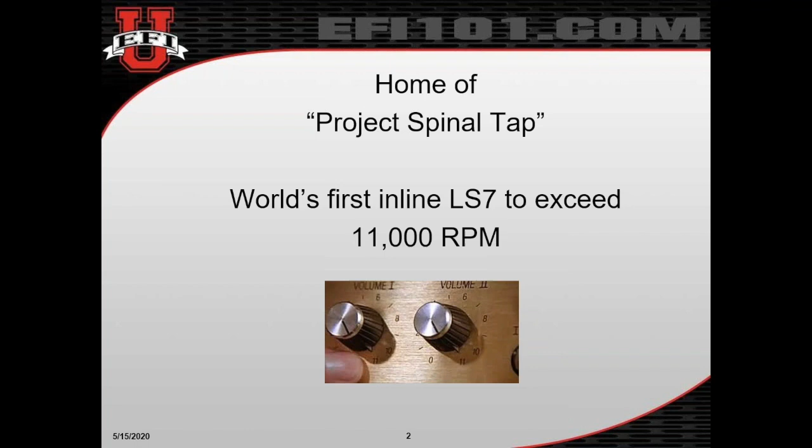I'm sure at least a few of you have probably seen some of that, but we tried this yesterday and it was a little tricky on the technical side to get the sound right. I'm going to try to show you guys a little video here so you can hear the sound of it. So what I did is I made a little video where we focused in on the actual laptop data, and we'll play it through and see if this works for you guys.

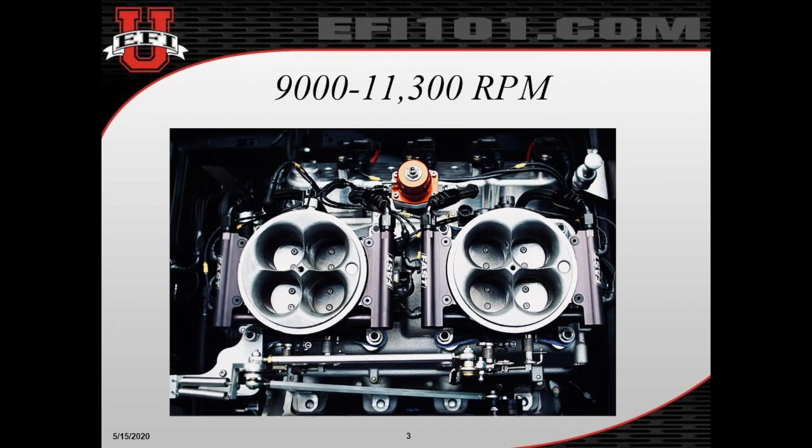So there's kind of a shot looking down into the engine. Now when we ran this thing for real, after all of the spintron testing and all the mocking up and assembly and disassembly and checking stuff, we put it on the dyno and actually ran it. And at the beginning of the dyno pull—now when we talk about high RPM engines, somebody, Lake or Keith, mentioned earlier, you don't start at 3,000 RPM, you start up close to where you're going to be. So most of these dyno pulls on engines like this are typically already starting beyond the RPM where peak engine torque happens.

We're not that interested in that lower area, because other than when you let the clutch out, you'll never see that RPM in a true drag race, say like a comp eliminator or pro stock application. You go to 10.5 and make a gear change and it only falls back to maybe 9,000, even though the engine might make peak torque at say 8,000 RPM. So to avoid stress on the engine, you typically start a little higher.

So this is the shot looking down in the throttle bodies of that engine, and we started the dyno pull at 9,000 RPM and went up from there. Let's try this real quick—you can see my mouse. We're basically in a high idle situation, waiting for water temp and oil temp and pan vacuum, everything to build. Hopefully you can hear the sound here when I play it, and you can see the beginning of the pull at 9,000, then it revs up at about a typical dyno pull rate of like 600 RPMs per second. So let's see if this will play and let us hear it.

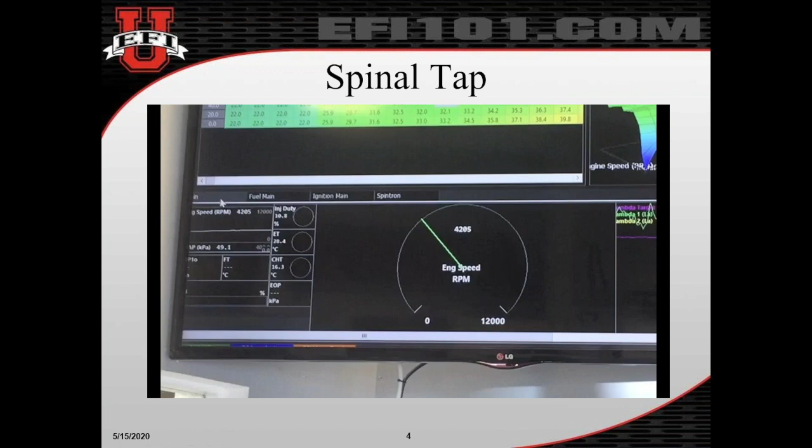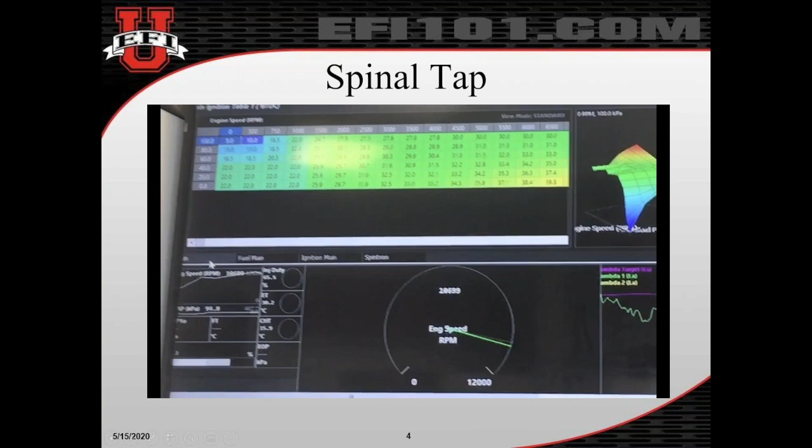All right, so hopefully you could hear that. I've probably only listened to that 6 or 7 million times because the sound just never stops being cool. And I saw it in real life. So hopefully you guys like that, hopefully you could hear it actually. If you didn't hear it, somebody let me know and I'll figure out how to play it again.

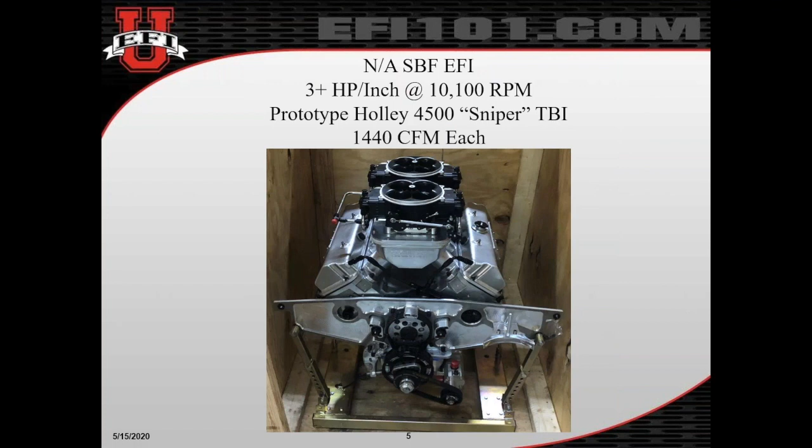So here's another example of an engine we just recently did. That was an EFI conversion. This is a naturally aspirated small block Ford engine. It made peak power at over 10,000 RPM and over 3 horsepower per cubic inch naturally aspirated, a very serious piece.

But what's cool about this engine is we used some prototype Holley 4500, what they call Sniper throttle body injection units. They flow about 1,400 CFM each, so we had plenty of airflow.

But we're kind of moving into this era where we've been told forever that EFI will never make as much power as carburetors. I've had to look at that so much over the years and shake my head, but in fairness, nobody's ever done a real comparison of where the fuel's coming from.

What's unique about the new Holley Sniper throttle bodies is that the fuel discharged from them - if you look inside those bowls, there's injectors in there, but they spray into a little annular discharge ring, and the fuel is distributed all the way around the throttle bore. So when you look down inside them, there's no booster venturis to get in the way. Billy alluded to that earlier, where in a traditional carburetor we're very concerned with airspeed through there to try to make sure we're metering fuel out of that venturi correctly. The downside is having that booster venturi there hurts airflow.

For a much smaller butterfly size or throttle opening, we can end up flowing a lot more air. The challenge has always been how do we get the fuel high enough in the system that we get that benefit of evaporation and cooling effect so we can make the power a real carburetor would make. So for the first time, we were able to actually run an engine and make more power with the EFI system than it made with a carburetor.

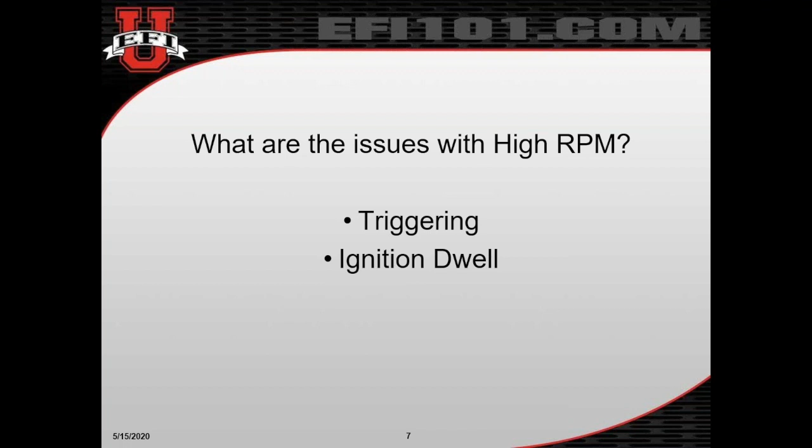So the first one is triggering - that's how we actually get the engine speed and position to the computer that's going to control things. After triggering, we have ignition dwell. If you're familiar with old school distributors with points, dwell is how long we have available to charge the coil so we can get enough energy. Then after triggering and dwell, we have the injector dead time and the offset. These are all contributing factors to what makes it difficult to do these extremely high RPMs.

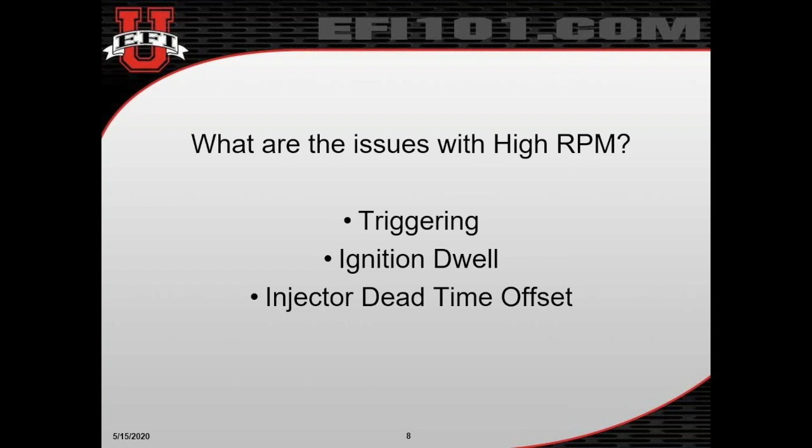Let's take a look here. Starting with the typical trigger system, you'd have a trigger wheel, what we'd call the reference - that's your RPM signal, typically on the crankshaft. Some engines also use a cam trigger, which we'd call a sync, because it synchronizes the position of the engine. So if I know where, for example, number 1 cylinder is relative to top dead center, what I don't know if I'm only looking at the crankshaft is whether I'm at the end of the exhaust stroke and beginning of the intake stroke at TDC, or at the top of the compression stroke ready to start my firing stroke at TDC.

By adding the cam sync, we can tell which half of that engine cycle we're on, and then we know how to fire which coil and which injector in the sequence of the engine. We'll point that out again later when we talk about the idea of sequentially firing a system.

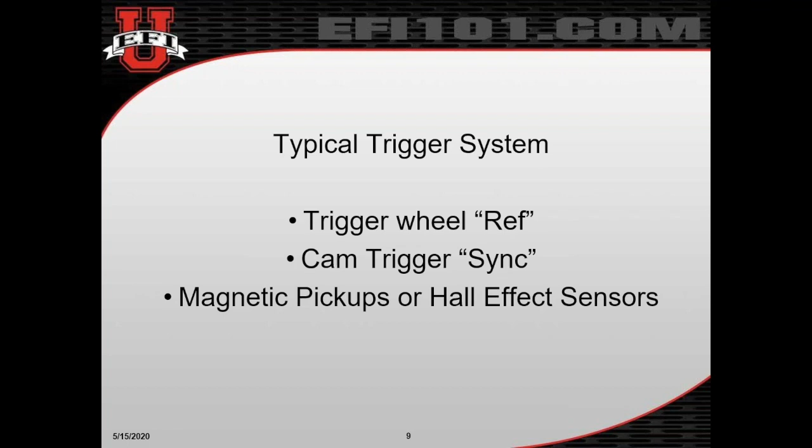Typically you would have either a magnetic or what's called a Hall effect sensor pickup. Those both have pros and cons, but generally what happens is if you're working on an engine, quite often people end up using whichever type came on the engine from the OEM. So unless you're building an engine from scratch and you needed to choose, there's not really a ton of upside or downside that makes one far superior to the other. Both can be used successfully.

Typically what that would look like is you'd have a crank sensor mounted physically to the engine block somewhere, and then on your crankshaft you have a wheel turning with some predefined teeth, the number of teeth, position, so on and so forth. And remember, that gives me my engine speed and position, but not necessarily the phasing of the engine. So I know where I am relative to TDC, but I'm not sure which TDC it actually is.

By adding that secondary sensor, it does the same thing, but this one would be on the camshaft. Now I have a recognizable event, because our camshaft is only spinning half the speed of the crankshaft, and therefore that event would occur less often, so we can arrange a trigger pattern that makes sense to the ECU to work out where we're at there.

Not all engines use those. In fact, the vast majority of pushrod V8 engines in drag racing do not use a secondary cam sensor, because it's just more stuff to bolt on and more wiring to have problems with and things that can fail.

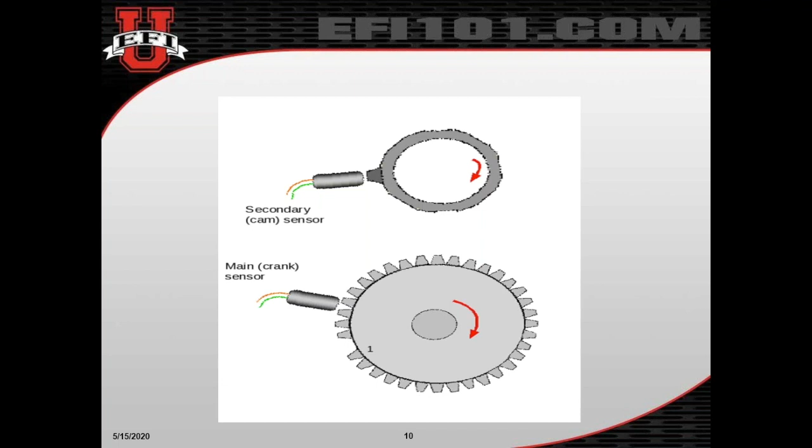So the vast majority of engines use some crank trigger and then typically an ignition distributor. There's no need to know where the camshaft is because the rotor in the distributor is phased to always point at the right cylinder. We're going to look at that here in just a little bit. And since they're not trying to fire fuel injectors in any particular order because it's carbureted, they don't need that cam sensor.

So the crank trigger or the ref sensor sits in close proximity to that reluctor wheel as we saw, and it provides angular position measurement to the ECU. Your computer would be programmed then with the tooth locations and the number of teeth. So you'll hear people use terms like LS1 uses a 24X trigger and an LS3 or an LS7 uses a 58X trigger.

And what they're talking about is the number of triggering events that are on that crank wheel for one revolution of the crankshaft. So the computer needs to be programmed with the tooth locations and the number of teeth in order for it to accurately understand where the engine is.

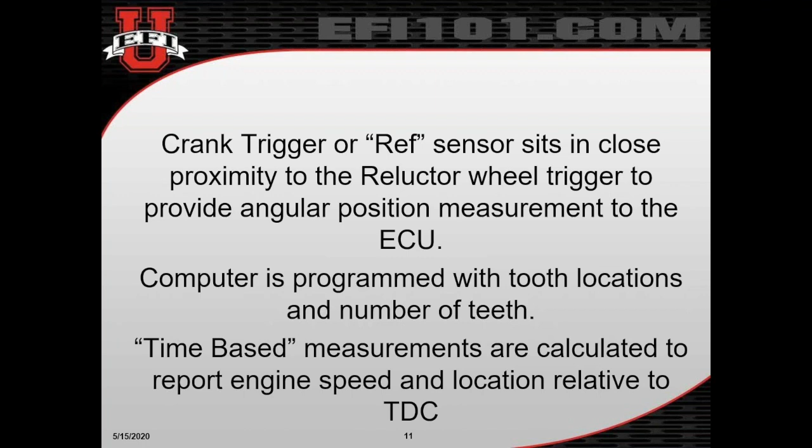So then these time-based measurements are calculated to report the engine speed relative to TDC. What do I mean when I say time-based? Well, many traditional systems, you guys have probably seen an MSD flying magnet. So generally with a flying magnet, you have 4 magnets on the actual crankshaft here, and then we have our pickup sensor down here that's located in proximity to the pickup, so the wheel. So from a physical measurement standpoint, we only get an event every 90 degrees.

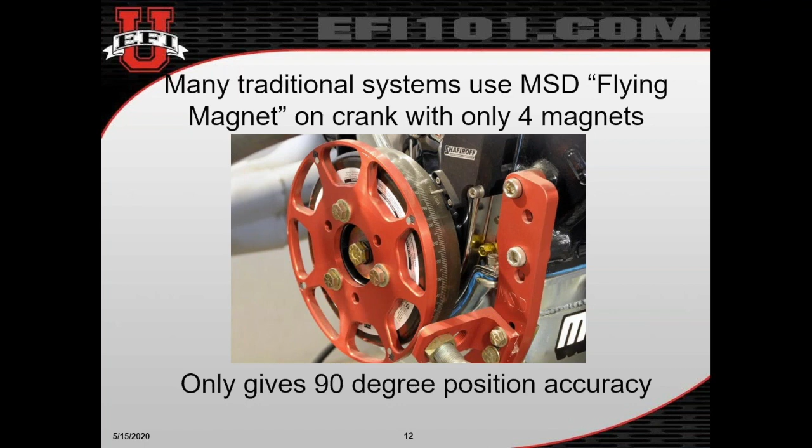So when I say time-based measurements, we can actually calculate the time between any 2 events and be able to work out pretty quickly how fast the engine's actually turning and whether it's speeding up or slowing down, so we can predict the right time to, say, fire a coil for a sparking event or maybe even a fuel injector or whatever. But in truth, most of it is based on an accurate guess of working out what the engine speed is after we physically know the position every 90 degrees.

So when we put more teeth on the trigger wheel, we get a higher position resolution, but obviously that also requires more computational power. So for example, a stock GM LS ECU or engine control unit typically limits the engine speed to approximately 8,000 RPM. It goes a little more than that on some, maybe 8,100, 8,200, but not much higher than that.

So in order to make an LS style engine go above that low 8,000 RPM range, the first thing that we had to do was dump the factory ECU and go to an aftermarket computer that was capable of much higher RPMs.

There are a lot of things you can change and retune and reprogram in a factory stock ECU, but the hard RPM limit is not one of them. It's hard coded in the ECU and it's not easy to change that.

So we did that when we were working on Project Spinal Tap, and after all the work and endeavors, the day we finally got it running was such a wave of relief, like oh my gosh, after 2 or 3 years of work, it's finally happening. I'll never forget the first time we revved the thing up, it was going up, started at 8,000 or 8,500, the thing's going up, and all of a sudden, bang, it just hits the rev limiter.

I'm like, man, I feel so dumb after all this time. I forgot to raise the rev limiter, and we hit the limiter at 9,200 or 9,300. I was like, man, that was a waste of a run and time on the valve springs and whatever else.

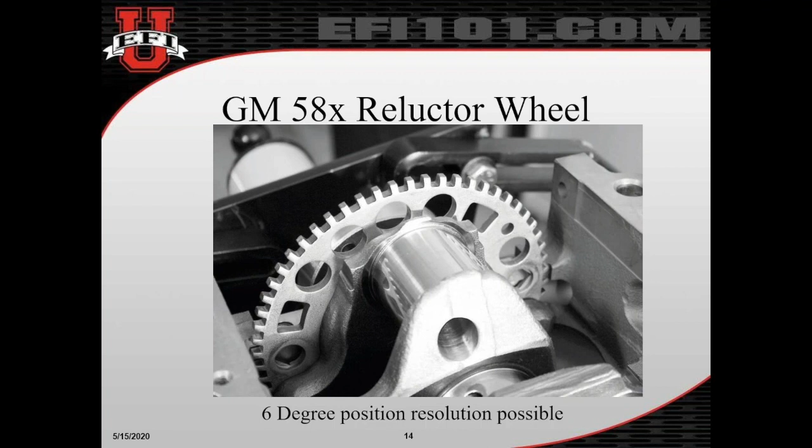To give you an idea, here's a look at the factory GM LS3, LS7, LS9, all of them. It's got 60 teeth on this wheel. They call it a 58X because there's 60 total teeth that are evenly spaced, but then they knock 2 of them off, so that every time that missing 2 teeth passes the sensor, we'll know where we are relative to TDC.

If I just had 60 evenly spaced teeth, I could count the engine speed, but I wouldn't know the engine position because there's no way to differentiate which tooth actually lines up near TDC. So by having a missing gap, it's really 58 events and 2 missing, so we call it 58X.

The nice thing about that is we have 6-degree position resolution because you have 360-degree travel and there's 60 teeth, so it works out pretty nice to have a really fine resolution.

So you got to ask yourself, why wouldn't you want that? Well, you would want that if you were running a normal vehicle.

GM and Bosch and all the other manufacturers that make those kind of wheels do it mostly so they can have more finite control of the engine, specifically in reference to things like exhaust emissions. It's easy to detect a cylinder misfire if I can see the engine's acceleration and deceleration rates more often than, say, every just 90 degrees of crank travel.

Not only can we see that the engine's speeding up or slowing down, but you could say, for example, I know that in one engine revolution, there should be 4 excitations of the crankshaft. Every time one of the pistons fires, it should speed that crankshaft up a little bit. So if somewhere around the circle we see a dip in engine speed or a deceleration, we could work out pretty quickly that somebody didn't do their job and one of those cylinders probably misfired. We can even tell which one it is if we know where it was in the firing order.

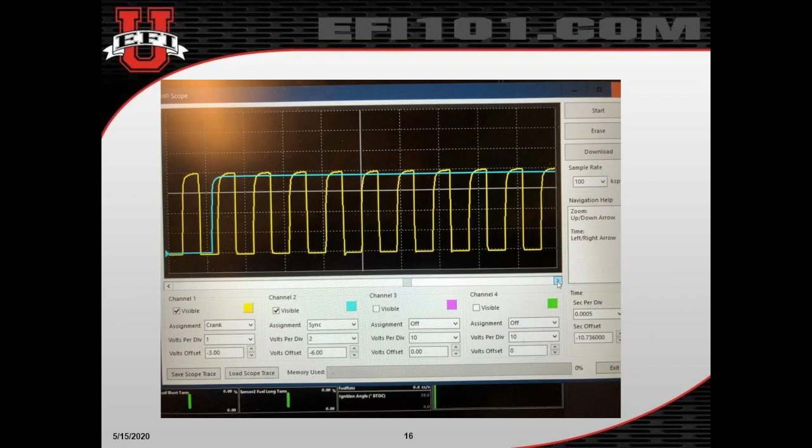As we go higher and higher in RPM, these triggers are coming faster and faster in frequency, and so this edge gets more rounded and more rounded. When that slope gets really steep down here, you can fall below the triggering threshold for what your ECU sees as an actual event, and it can get filtered out. When that happens, you get into a situation where it will just drop a cylinder, cut, or misfire, and it will fool you, like it did me, into thinking you're sitting on a rev limiter when you're really not.

So what's the right answer? Do I use a 4X trigger and give up my resolution, or do I use a 58X trigger and have all the resolution but have this high-speed issue?

Well, we ran into this problem in 2016 and 2017 when the NHRA Pro Stock teams went to EFI. Everybody on the surface wanted the high resolution, but what we found is we got into issues where that could be a problem. So we tried a bunch of different wheels - 8 teeth, 12 teeth, 24, 36, you name it.

And what we found was the 36-1, or 36 evenly spaced teeth with 1 missing, was a great compromise. With a 36-1 wheel, we get every 10 degrees of resolution possible, but we could do a lot more total engine speed with a 36-1 than we could going to a 58X. So with the 58X, we get a little bit more resolution, but at the cost of a lot lower total RPM capability, whereas going from a 4X tooth to a 36X tooth, we get a ton more resolution.

Just as an example, if you could do 9,200 RPM with 60 teeth, and that was roughly the limit, well if I cut those teeth down to only 36 events per revolution, that's 67% more RPM I could do. So by going to a simple change like a 36-1 trigger, we could theoretically do 15,300 and even more RPM.

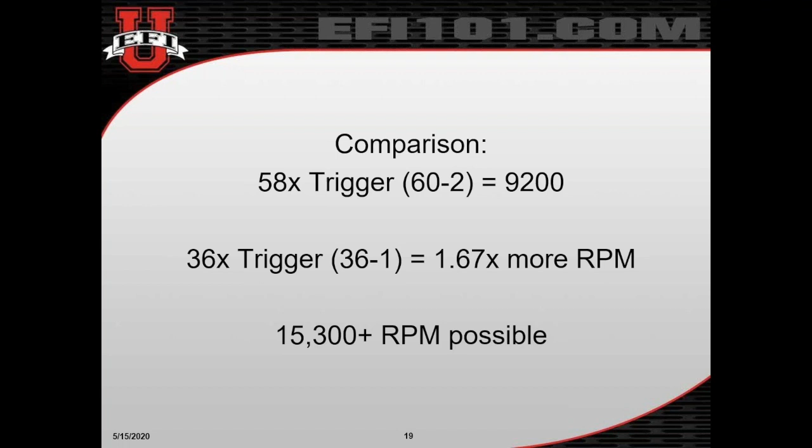Just use as much resolution as you need, but not more than you need, because it can get you. So there you go, that's just a little insight on what we learned from triggering. So let's talk about the ignition system then.

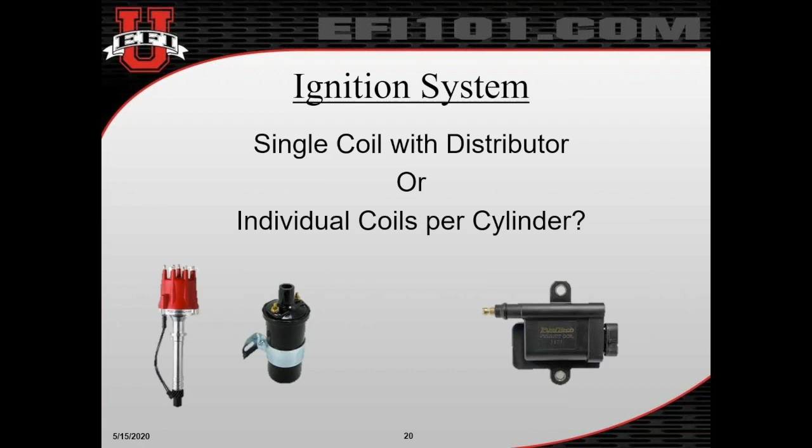Traditionally, your ignition system would have a single coil and a distributor, or you might have individual coils per cylinder with a more modern system. So the question becomes, what's the advantage? It costs a lot more, I've got more wiring, more things that can fail. Why would I want to do that?

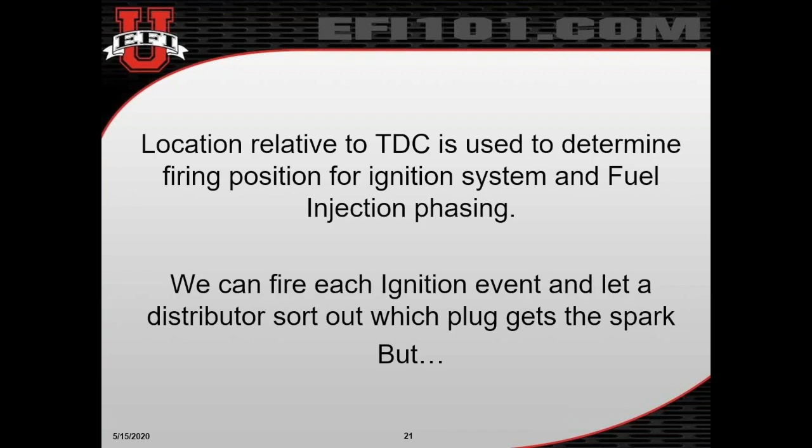We could get the location relative to TDC and use that to determine the firing position for both my ignition system and my fuel injection phasing. We fire each ignition event and let the distributor sort it out, and the spark plug gets its spark based on where the rotor's phase. A lot of people do that, even with a throttle body EFI system or carburetors, but they want to run a distributor. It's easy to do with a crank trigger and not need a cam trigger.

What we're talking about here is when we go to charge the coil - we talked about dwell earlier. A lot of people ask, what's dwell? It's the time it takes the coil to charge from your primary battery voltage to the secondary level, and that typically takes between 3 to 5 milliseconds to fully charge. So we're talking about thousandths of a second.

If you run out of energy here - if I started charging this coil and stopped in the middle before reaching the peak - I wouldn't have the maximum energy available to fire the spark plug. Maybe that's a problem, maybe it's not, but I'll show you an example.

This is what they call the Mercury Marine, or the smart coil, that's used in tons of different applications. I don't have one of the old-fashioned coils to show you because I was born in 1976 and we're not using antique stuff anymore.

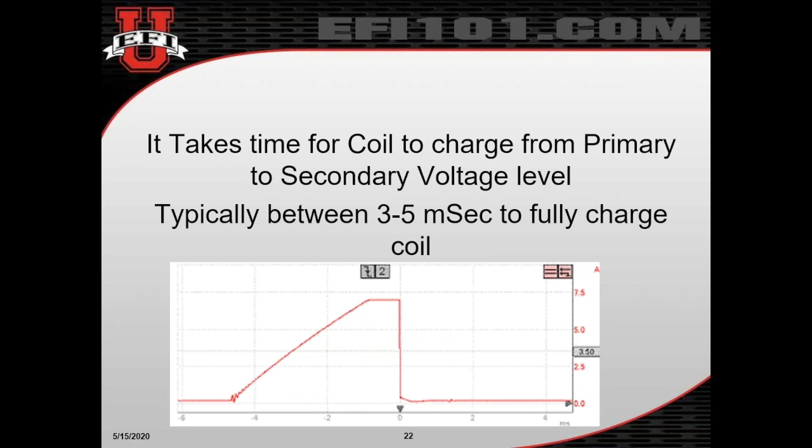So let's think about that a minute. In order to give full spark energy to the cylinders, we're going to need somewhere between 3 to 5 milliseconds to charge each coil. I've got 8 times I need to fire if I have a V8 engine. So 3 times 8 is 24 milliseconds, and 5 milliseconds times 8 is 40. I need somewhere between 24 and 40 milliseconds worth of time to actually charge and fire all the spark plugs with maximum coil energy on a V8 engine.

In our little graph here, you can see the dwell time is how long I'm actually charging the coil, from B to C basically, and at A, I fire the thing. Now that I'm done, I can rest between A and B in my idle time - I can rest for however long is available before it's time to start charging again for the next event.

Thinking about that for a minute, how long does an engine cycle actually take? When I talk about an engine cycle for a 4-stroke V8 engine, remember I'm talking about 2 revolutions of the crankshaft - the first one fires half the cylinders, the second one fires the other half. Here's an easy math problem for you to remember: if you want to know how much time it takes for an engine cycle in milliseconds, all you have to remember is this easy formula - it's 120,000 divided by the RPM.

Go ahead and try it. I'll wait. All right, that's long enough.

You guys are taking too long. I'll just give you an example here.

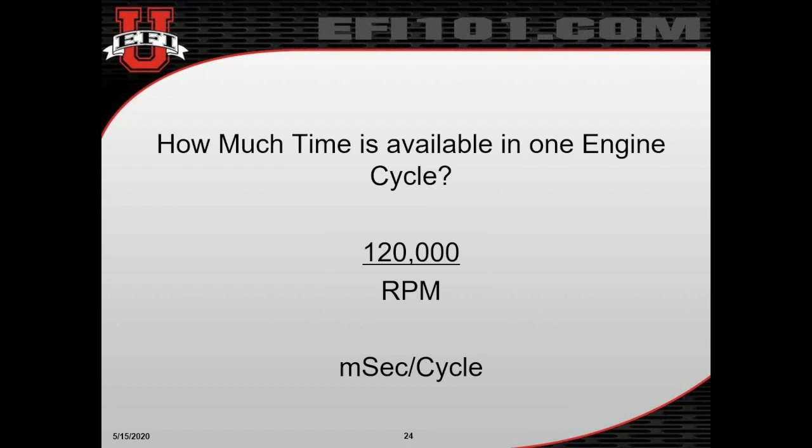Using that math problem, at 6,000 RPM we have 20 milliseconds. But at 10,000 RPM, because the engine's turning faster, it only takes 12 milliseconds. And at 12,000 RPM, it only takes 10 milliseconds. Now think about that for just a second.

Let's talk about 6,000 RPM. What's actually happening in an engine cycle? We start at top dead center, and the intake valve opens while the piston begins to move down. That creates a larger volume in the cylinder, which lowers the cylinder pressure. So we have a differential across the intake valve that causes air and hopefully fuel to start moving into the cylinder. The piston goes all the way down to the bottom, then starts going back up and compressing that mixture. At some point we close the intake valve so no more air and fuel can get in or out.

We continue compressing that mixture until somewhere near top dead center, we light the spark plug a little bit early. That's what we call spark advance, to give the flame a running start and an advantage to burn all the mixture in the chamber. Now that burning mixture starts to expand and puts power and energy against the piston, pushing it back down in the bore. It's putting leverage against the crankshaft, but the whole time my volume's getting bigger, so I'm losing pressure.

Somewhere near the bottom half of that stroke, or getting close to bottom dead center, we open the exhaust valve and start moving exhaust out of the engine. The piston gets to the bottom and stops, then starts coming all the way back up, pushing that air out the exhaust valve because of the higher pressure being created by the lower volume. We get all the way to the top, and hopefully we'll have a low pressure in the exhaust system that helps draw some of that air out and scavenge the cylinder, and then we're done and can start over.

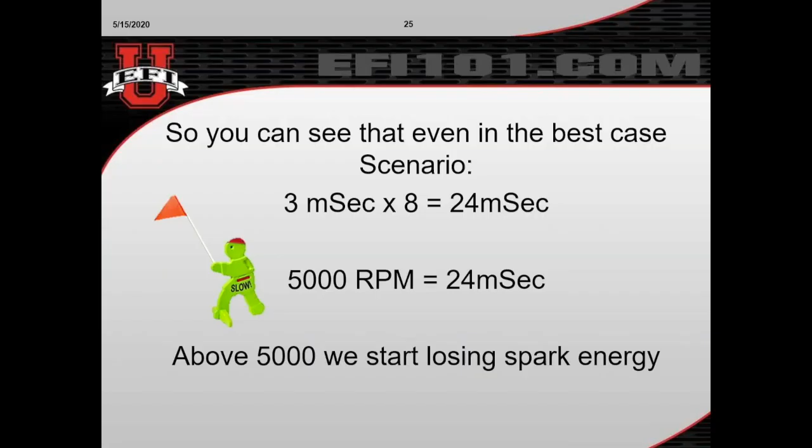As you can see, if I have a single coil, even in the best case scenario where it only takes 3 milliseconds to charge my coil, and I have to charge it 8 times, that's 24 milliseconds. Well, at 5,000 RPM, the entire engine cycle takes 24 milliseconds. That means with a single coil, after 5,000 RPM, I'm no longer able to completely charge and discharge the standard old-fashioned points ignition or HEI style ignition coil. We physically do not have enough time left in the engine cycle to do that.

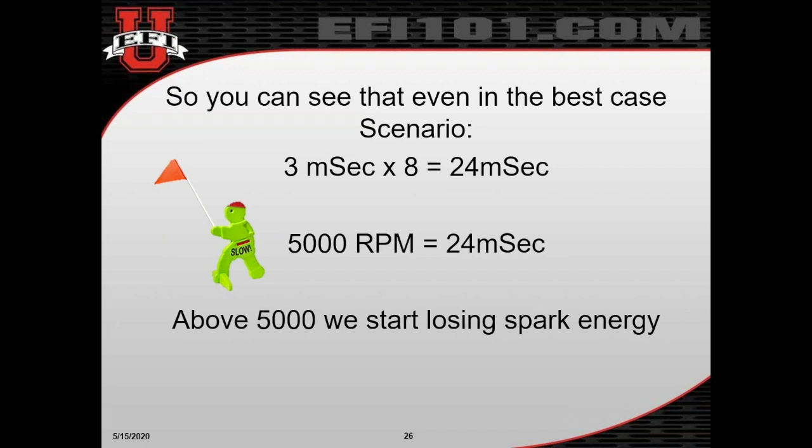Traditionally, the way to overcome that is to start with a huge excess of coil spark energy, more than we actually needed to get the event done, so that as I'm losing some, I don't fall below the required amount that it takes to actually light the cylinder.

Some of this can be overcome by using an ignition system that starts out with a large excess of energy, such as an MSD-like capacitive discharge ignition system. The CDI stores energy in capacitors and can have a much higher primary voltage delivered to the ignition coil much faster, so we have more excess of time available. Even though our RPM is going up and up, I still have more ignition energy than I actually needed to fire the spark plug, so I can kind of get away with that time, as Billy calls it, the time-space continuum.

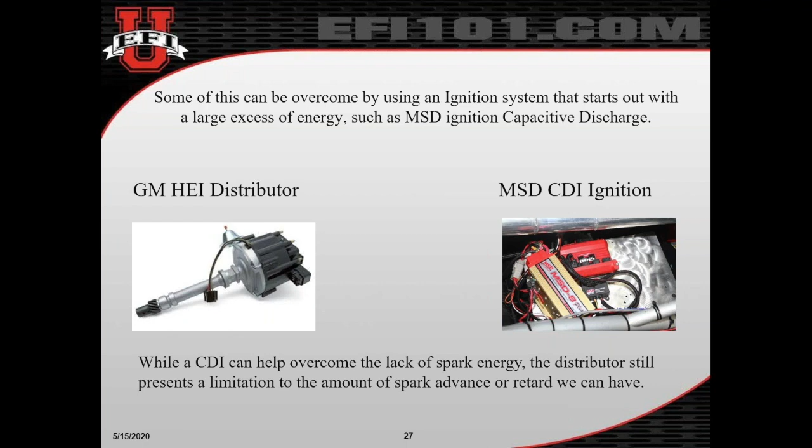So while we could solve that distributor-based problem with a CDI and get the spark energy we need, we still have a physical limitation by using a distributor rather than individual ignition coils. That maybe isn't a problem for a naturally aspirated drag racer, but if you're doing nitrous, or some form of boost with a procharger, supercharger, or turbo, quite often you have pretty extreme swings in what you want to do with your ignition timing that are limited by the physical travel of the distributor and the rotor phasing inside it. So by going to individual coils, we can use a cam sync instead of just having a crank trigger and a distributor.

If we use a cam sync, since we know where we are within the engine cycle, we can tell if I'm on the exhaust stroke or the TDC compression stroke. So now we can fire each coil and fuel injector simultaneously and in order, in the correct firing order. So if you think about that, where I had one coil that needed to fire 8 times in one engine cycle, now I have 8 coils that individually only need to fire once per engine cycle. 1 divided by 8 - obviously you get the idea - I have 87.5% more time for the coils to rest and recharge.

So in terms of doing high RPM, high energy ignitions, the benefit we gave up by not having the high energy CDI capacitive discharge ignition systems - which, in fairness, produce a very hot spark - is that they do it for a very short duration. So what can happen at extreme engine speeds is, even though I get a very hot spark from a capacitive discharge ignition, the actual spark event only lasts for 1, 2, or 3 degrees of crank rotation. So if anything happens with your mixture distribution inside the cylinder where you miss it, you're out of luck - you're going to have a cylinder misfire.

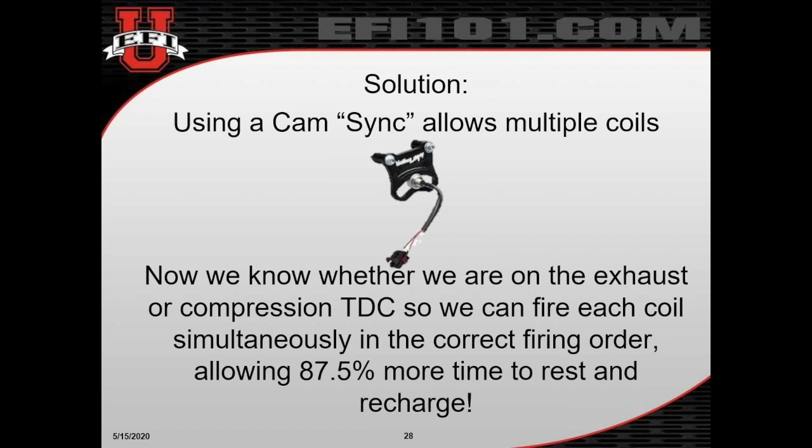Even though inductive style ignition systems like our smart coils technically have less energy available than a traditional CDI, they typically will discharge that spark across the plug gap at, say, 10,000 RPM for something in the order of 14 or 15 total crank degrees. So you might get 6 to 7 or even 8 times as long an opportunity to light the mixture because of the length of time it takes the spark to jump across the plug gap. So I'm a big fan of using these smart inductive style coils in a high RPM application because I have enough spark energy to do the job, I get a long spark duration to give me the most opportunity to get the mixture lit, and I get a lot of time to make sure that coil is fully charged. It's a great example of using modern technology in a high RPM engine.

Here's an example of individual coils in each cylinder. It gives us the ability to have extreme advance or retard functions, such as doing boost enhancement or smoother rev limiting. A lot of people ask what I mean by rev limiting. If you think about what's happening to the engine and crankshaft - you're at 10 or 11,000 RPM, or who knows what, and suddenly you start banging the rev limiter - the amount of torsional twist that happens to the crankshaft because one cylinder isn't doing its job, or 2 or 4 randomly, means we're pounding on the crankshaft while the counterweights try to keep everything in balance, and then suddenly it doesn't fire for a couple of cycles.

That twisting motion of the crankshaft takes a beating, and so does everything else behind it, drivetrain and everything. So by being able to do some of our rev limiting by retarding the ignition timing, much like an OEM strategy, we can limit the engine's torque output temporarily with a 1 cycle or 2 cycle retard function rather than simply a cut and chopping that cylinder off.

So we get a lot of advantages to the individual coil per cylinder type application in a high-speed engine that aren't necessarily showing through on the surface if you were only to look at the spec sheets of how much energy this one has and how much energy this one has. It doesn't really show up until you actually start doing this stuff. So there you go, hope you guys like that.

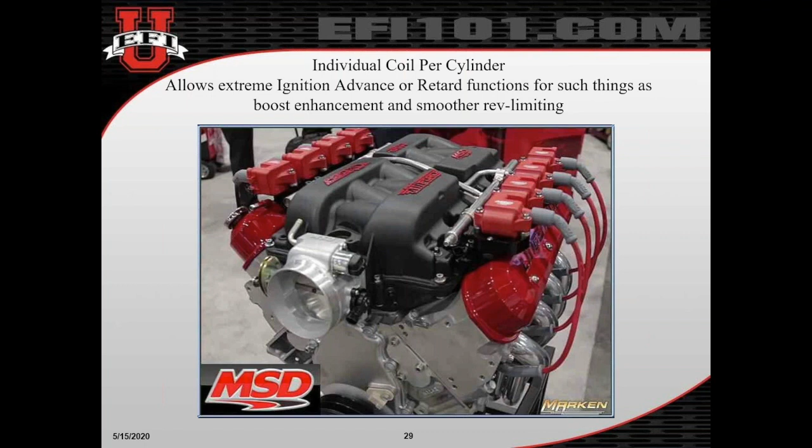But one of the big ones that pops up a lot is what happens to the fuel injectors in a high-speed engine, especially when we do this without a cam sync sensor. So let's talk about it a second.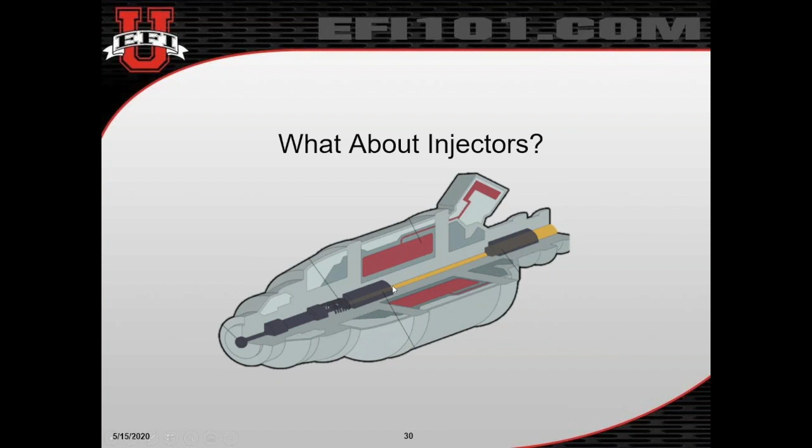So when we talk about injectors, a lot of people talk about the injector size and the flow rate of the injector and pulse width and duty cycle and all these different things. But the one that I want to focus on for just a minute here is called duty cycle. And if you're not familiar, I want to simplify it for you, because the duty cycle of an injector is the comparison of the flow capacity of the injector to what your engine actually demands. So there's more technical ways to describe it when we talk about the relationship of injector pulse width to time per engine cycle and all that.

Let's say I have a V8 engine and I have 8 injectors. Now these injectors, here's one, and here's one. They flow 80 pounds per hour each. That's what we call the slope of the injector. So since I have 8 of them and each one flows 80 pounds per hour, we could assume that I'm going to have a total of 640 pounds per hour of fuel flow available to give my engine.

So what determines how much of that fuel flow the engine's actually going to see? Well, the answer is how much power you make. So let's say we have an engine that makes 1,200 horsepower. Now this 1,200 horsepower engine has a brake-specific fuel consumption of 0.45. If you're unfamiliar, brake-specific fuel consumption is a measurement that we take that shows us, for the amount of fuel we actually consumed, how much power did we actually make. So a typical high RPM, naturally aspirated, high compression engine, they'll be 0.45 or better. Most of the time even better than that, but this is a good example.

So let's say I need to feed a 1,200 horsepower engine, and it needs 0.45 pounds of fuel for every horsepower per hour. Well, doing some quick math, if you multiply 1,200 times 0.45, you see that we're going to need 540 pounds per hour to feed the demand of that engine. Make sense? All right, so now let's compare how much fuel we need to how much fuel we actually have available. So in the next slide, we're going to need roughly 84% of the injector's capacity. Regardless of what engine speed we're talking about, we're going to need 84%.

But percentages and real actual time, they're not the same thing. So let's take a look at what I'm talking about.

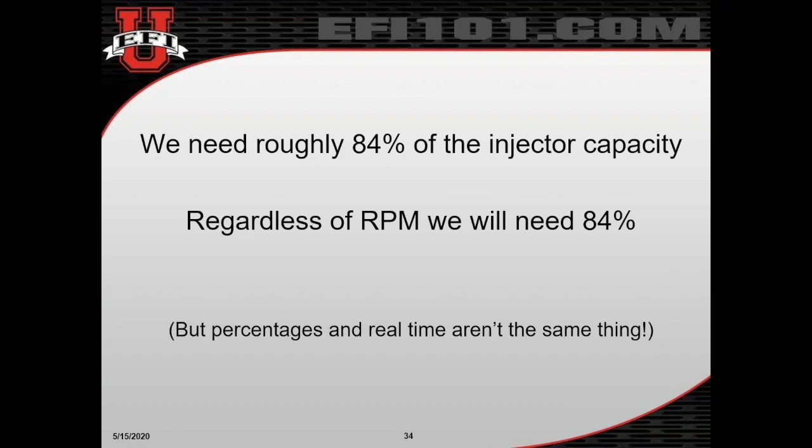Now, the slope of the injector determines how much time it will take to deliver the required fuel flow. We said the injector flows 80 pounds per hour. Since the slope is assumed to be fairly linear, if it gives me 80 pounds in an hour, it should be able to give me 160 pounds in 2 hours. And for that matter, it should give me 40 pounds in half an hour, assuming our slope is linear, which at least in the usable portion, we're hoping that it is.

But what I'm getting at is the slope is a linear amount of fuel delivered the more I increase the time that I turn the fuel injector on for. But pulse width is what we use to determine how long the injector is turned on for. So I'm going to have to give this injector a pulse width that will deliver the required amount of fuel to feed that engine's 1,200 horsepower. The question becomes, how much time is available to give it that pulse width?

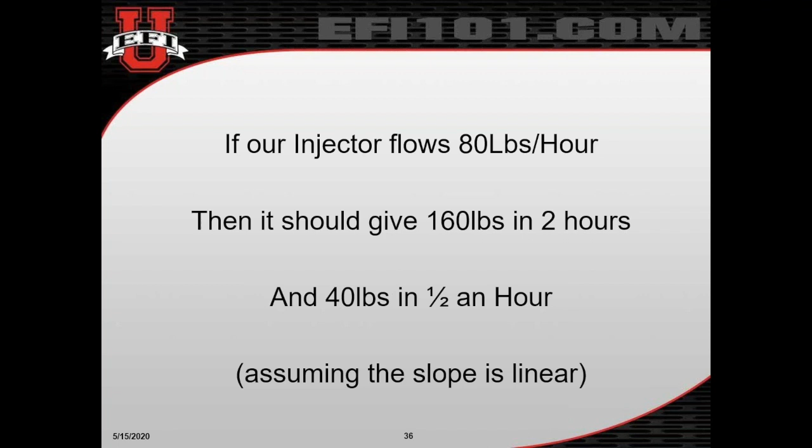And the answer is, well, it depends on your engine speed. So let's take a look. So the injector is a solenoid valve.

If we go back and look at our injector, you can see that this magnetic coil needs to energize once that signal command comes, and that magnetic field needs to draw that pintle or that valve up off the seat, and that doesn't happen instantaneously. So because it doesn't happen instantaneously, we have a little bit of time where the injector misbehaves and doesn't do what we tell it. So we call that offset or dead time.

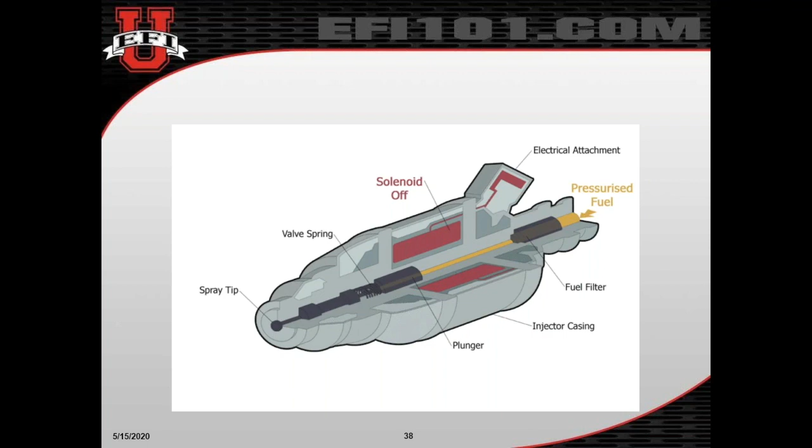Now that I got it all going and I say, okay, I'm good, stop, you can shut off, just be done, it takes a little bit of time to put the brakes on and shut everything off as well. So the physical construction of the injector has a huge outcome on how much that dead time is.

The next thing that affects the fuel injector is the actual fuel pressure that you're putting in this thing. If you put more and more force down in there trying to hold that valve closed, it's going to be more and more difficult to get that valve to open against the pressure. So fuel pressure will affect your actual dead time.

And last thing will be battery voltage. The lower the voltage you have, the longer it's going to take and the less strength your magnetic field is going to have to be able to move that injector off the seat. So those are three things that are going to affect how much dead time we actually have.

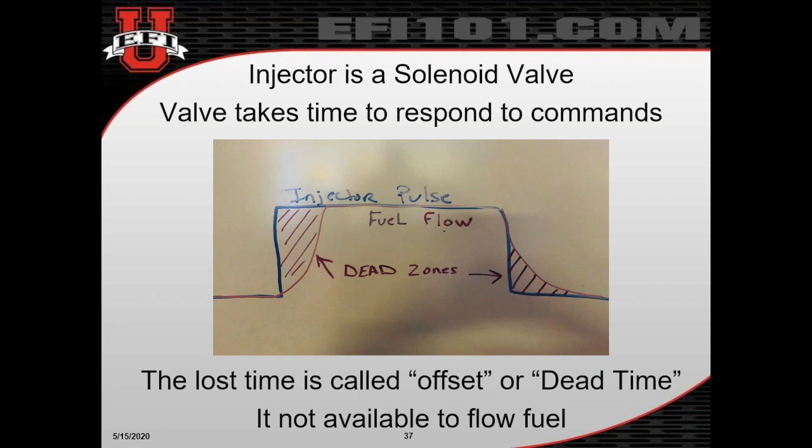If you had a garden hose and you turned up the water pressure, more water is going to come out in a period of time.

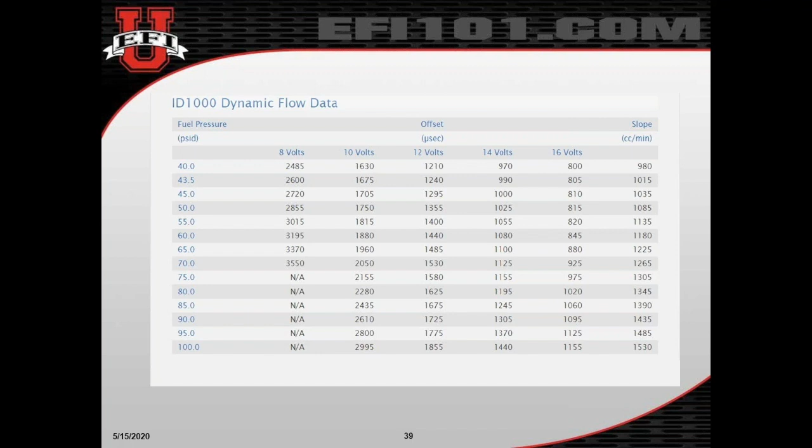So traditionally, people would say that you should limit your injector's duty cycle in an engine to 85%, and nobody ever really questions why that is. I hear people say things like, oh, it's because you don't want to overheat the injector, and it's like, no. You have a cooling medium flowing through the injector all the time anyway with your fuel. It's not about overheating it. It's about making sure that there's enough physical time left in the cycle to make the injector behave.

So I'm going to draw a picture for you, or with my words anyway, and let's use an example. Let's say I got my fuel injector, and based on my battery voltage and my fuel pressure, it has an offset or a dead time of 1 millisecond. Now, 1 millisecond, that's only 1,000th of a second. It's not that much time, but every time we fire this injector, we're going to lose 1,000th of a second.

So since that's a pretty small amount of time, it almost doesn't matter. And since I don't want to add a lot of complexity to my system, I'm just going to ignore the cam sync. What I'm going to do is just run a crank trigger and fire the injectors however I need to. So let's find out, what is all this dead time actually going to cost me in real numbers?

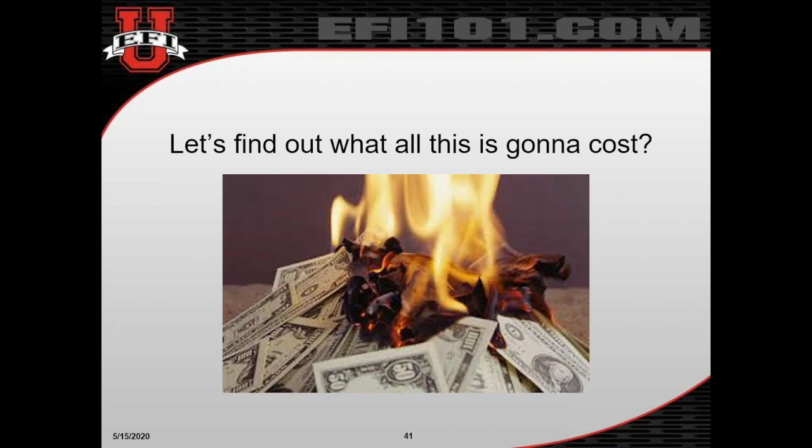Well, there's two ways that I can deliver the required fuel. Remember, it's required. I have to get that fuel into the engine. Otherwise, I'm going to be calling up Lake and Keith over there for a new set of piston rings after I lean it out and burn this thing up. So we want to keep that cost down. We got to make sure we deliver the required amount of fuel. The engine is demanding that fuel, not asking for it nicely. It's saying, I got to have it.

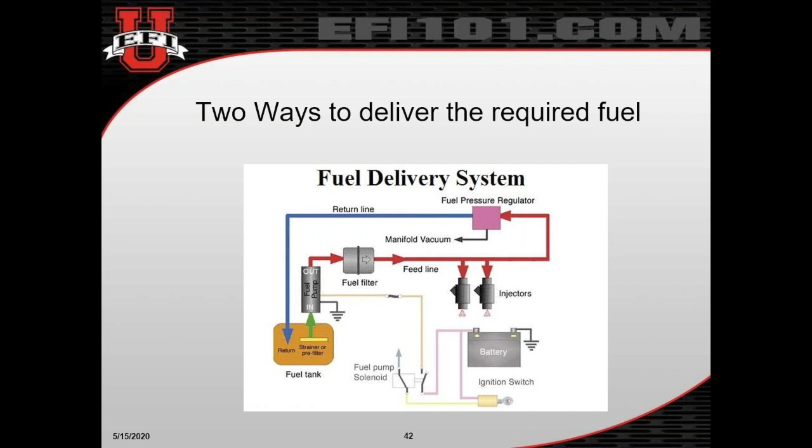So a typical fuel delivery system: you got your tank and a strainer and a fuel pump, and it goes through a filter, and you have a pressure regulator that's keeping our pressure where we want it, and we have fuel injectors. So the fuel injectors turn on and off to deliver the fuel, and there's a couple different ways that we can manage the injectors that we have. Assuming that what we have is more than one fuel injector, we have to decide, do we want to fire them all in a sequential order, one at a time?

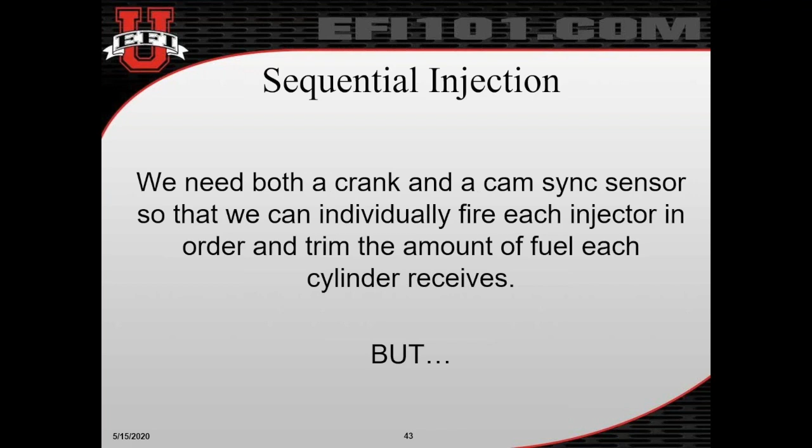Well, that's ideal, but we need both a crank and a cam sync sensor to be able to do that, so we can fire them individually within the firing order and place them at the right time in the cycle. But again, that cam sync adds a lot of complexity, and I just don't want to deal with it. It's more money. So there's nothing wrong with doing what's called batch fired injection for most engines.

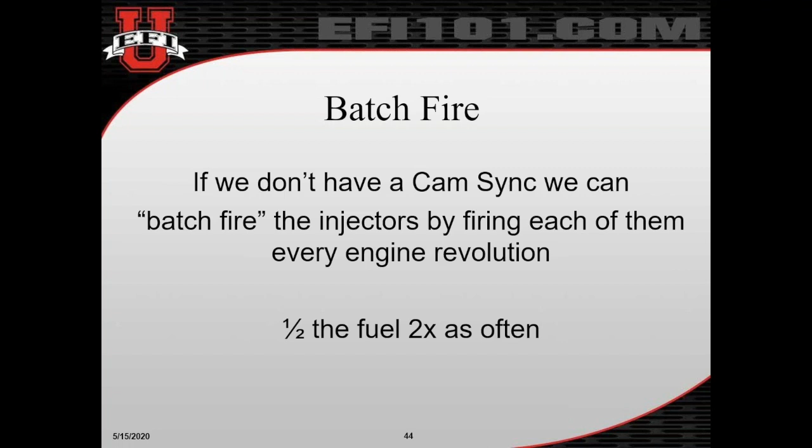In a batch fire system, we don't need the cam sync because we're just going to fire the injectors every revolution of the crankshaft instead of every other revolution in the firing order. What we're going to do is cut the time that I fire the injector in half, but fire it twice as often. So there you go. I get the same amount of fuel, half as much, twice as often. Everybody's happy. Well, let's think about that.

That means if I do that on every engine cycle, since I turned the injector on twice, I had to pay for the offset and the dead time twice. So here's the deal. We are going to assume we have an injector with a dead time of 1 millisecond, 1,000th of a second.

So that means we know from earlier that we had a 1,200 horsepower engine and it had a 0.45 brake specific. I'm just going back to our example. So we have 8 injectors, they flow 80 pounds per hour, so we have 640 pounds per hour available, and we need 540 pounds per hour. So we're going to need 84% of the capacity.

In other words, I'm going to have to use 84% of the time available in the engine cycle to be spraying fuel. So that means whatever the engine speed gets to, I got to make sure that there's a minimum of at least 2 milliseconds left over to accommodate the offset or the dead time of my injector. If I don't, I will start cannibalizing my fuel flow into my dead time, and I will no longer have precise control over how much fuel the engine actually gets.

So let's go back and look at our earlier example where I had 6,000 RPM. Well, that takes 20 milliseconds. So that means if I take my 2 out, I'll still have 18 milliseconds available to be able to spray fuel. At 10,000 RPM, there's only 12 milliseconds total available. I still have my 2 milliseconds worth of dead time because it's 1 per fire and I'm firing it twice per cycle. So then now I take my 12 and subtract 2, I'm only left with 10.

At 12,000 RPM, it gets worse. I only have 10. I take my 2 out, now I've got 8. So using a little bit of algebra, we can figure out, if you want to do this without a cam sync sensor and you're going to batch fire your injectors, you're only going to be able to get to about 9,600 RPM before you lose control of your fuel injectors.

At 9,600 RPM, using our little formula, 120,000 divided by the RPM, we can see that there's 12.5 milliseconds available per engine cycle. So if I take my 2 milliseconds out for my dead time, since I'm batch firing this thing twice, that only leaves me with 10.5 available. Well, 10.5 available out of 12.5 available, that's my 84%.

So if I start increasing the RPMs above 9,600, I'm going to take my 2 milliseconds worth of dead time out, but then I'm not going to have enough time left to accurately flow all of the fuel the engine needs. So high RPM engine operation gets tricky if the dead time of my injectors is really large.

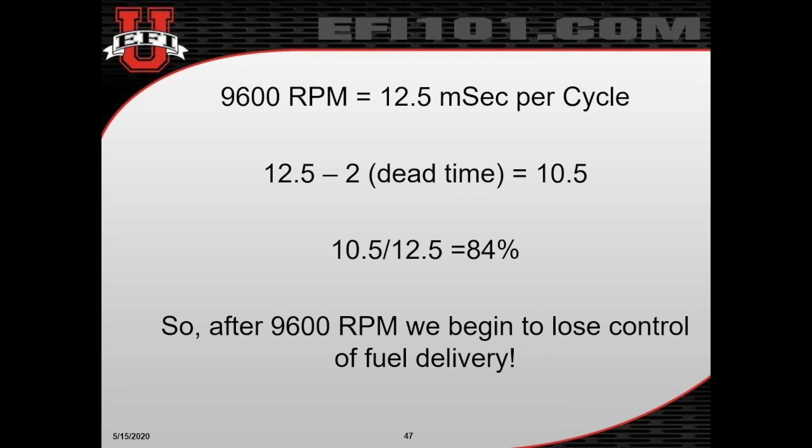So the question becomes, what are you going to do about it? Well, if you're the kind of guy that just runs big block Chevys, old school, and you want to convert to EFI and it's going in a boat where you're only going to see 5,500 RPM max, it's really not a problem for you. Forget everything I said and don't worry about it. Just go about your way and enjoy your day.

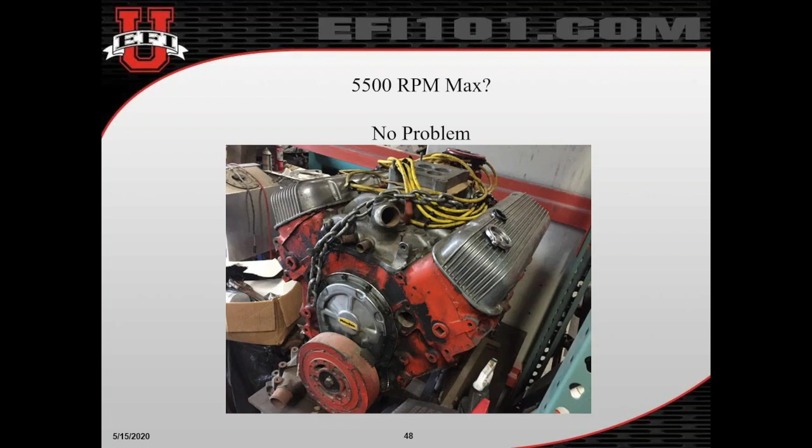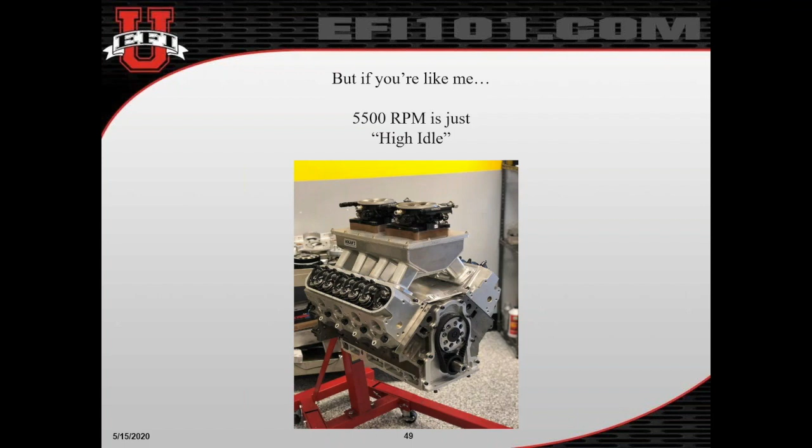However, if you're like me, 5,500 RPM is just kind of high idle. We're just waiting to start the dyno pull at 8,500 or 9,000. And so we actually have to pay attention to stuff like this. And ask me how I know, I'll be glad to tell you. So the question is, what do I do about it?

Well, first and foremost, I could change to a sequential operation by using that cam sync sensor, because now I'm only going to fire the injector once per engine cycle. That means instead of having 2 milliseconds of dead time total, I'm only going to have 1. So I've cut that offset in half.

It allows me to increase the range I can get to. The other thing I could do is use a larger flowing injector, because then the amount of time I'll need to hold the injector open to supply the required fuel gets smaller. So if I have an injector with a larger slope, I'll need less time available to do the job. Or instead of using a 12-volt battery system, maybe I go to 16-volt.

You'll remember that the amount of time it takes to offset the injector is dependent on battery voltage. So the more voltage I have available, the less time I have to waste waiting for the injector to respond. So then obviously I've got more RPM capability available to me.

Lastly, choose an injector that inherently has a lower offset. If you can find one that has a low enough offset, that has a high enough slope to give you the amount of fuel your engine requires, it's a great fix.

All of these are things we needed to do when we were trying to make these EFI naturally aspirated high compression ratio engines go to 10,000 RPM and beyond, because they were things that didn't used to matter, and now all of a sudden they did.

All right, super, Ben. That was a great presentation. Thanks. That's something that a lot of engine builders in the shops don't get a chance to see, the stuff you're showing. It's sort of learning tooling techniques and honing and that kind of stuff, but to actually learn about what's going on the outside, that was really, really well done. So thank you very, very much. Yeah, no worries. It's fun to share this.

Do cylinder pressures increase proportionally with engine speed? No, most of the time they go down. Cylinder pressure is directly proportional to torque output. So your highest cylinder pressure is typically going to be where your engine makes peak torque.

If you look at a typical dyno graph, you'll have a peak torque, and then your power continues to go up after that, even though the torque is dropping off. The reason is that horsepower is a function of how much torque you can do over a period of time. So one of the secrets to making huge power per cubic inch numbers that we typically brag about, which frankly aren't that valid, is that as we do more RPM, we can get away with less cylinder pressure because we're simply doing it more often.